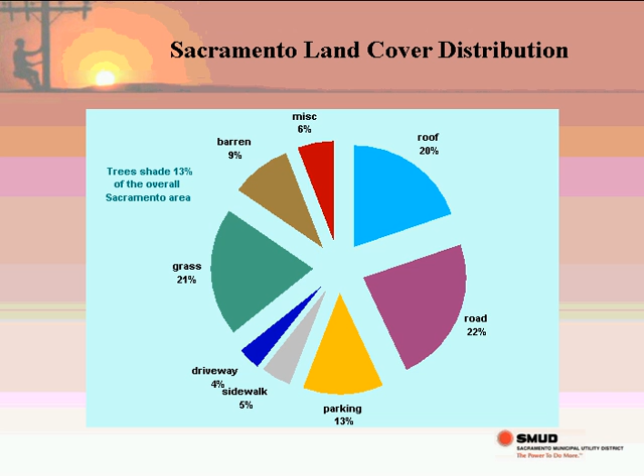So what we did early in the 1990s was an assessment: what is the land cover distribution? And we discovered that about 21% of our land cover is vegetation, grass or trees. In fact, about 13% trees. Then 20% are roof, 22% are roads, 13% parking, etc. So we developed a program to mitigate the urban heat island effect. One way to mitigate the urban heat island effect is to increase vegetation. So in 1990, we started the SMUD Shade Tree program.

Then in 2001, we started the cool roof program. The objective was to increase the roof albedo or reflectivity. And with both the shade tree program and cool roof program, SMUD was the first utility in the nation to set up a program to promote tree planting and cool roofs. We do not have anything for light color pavements, but the bottom line is we have at least two programs for two measures: increase vegetation and increase roof albedos.

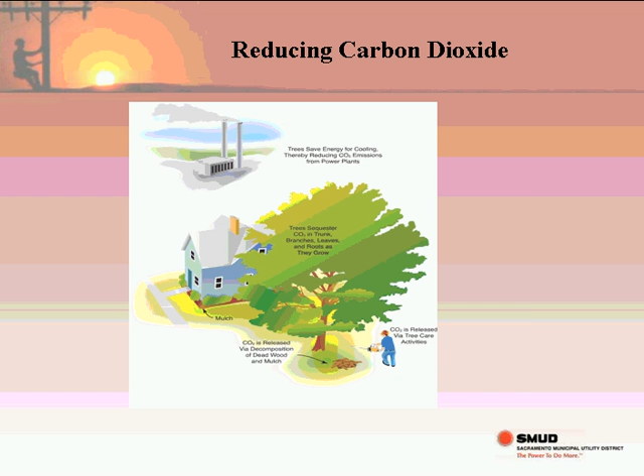Trees provide energy-saving benefits. They provide direct shading. They provide evapotranspiration effect. In the winter months, they provide a wind shield and therefore reduce the heating need. So they provide clearly energy-saving benefits. Trees also provide benefits in terms of carbon sequestration. They sequester carbon from carbon dioxide, and also they improve our air quality. They release oxygen back into the atmosphere.

So when we define the program objectives, our primary and short-term objective is clearly load reduction, reduced electric peak demand of air conditioning during the hot summer months. And we have very hot summer days, 5 to 10 times in a month. In the summer months, the temperature exceeds 100 degrees Fahrenheit.

Our secondary long-term objective is reducing the urban heat island effect, reducing the ambient temperature in the city 1 to 2 degrees Fahrenheit, and therefore indirectly reducing the air conditioning need. And the tertiary long-term objective is market transformation. We would like trees to be the standard practice when it comes to urban planning, urban growth.

And we recognize immediately up front that trees provide positive externalities like air quality improvements, carbon sequestration, enhancing aesthetics in the region, promoting the sense of community, but we do not necessarily quantify those benefits and try to incorporate them into cost-effectiveness analysis.

We started the program Sacramento Shade in 1990. The program was implemented in collaboration with the Sacramento Tree Foundation, which is a local nonprofit community-based organization. It's funded 100% by SMUD. We provide pretty much everything free: 5-gallon trees, stakes, ties, fertilizers, and expert advice coming from Sacramento Tree Foundation.

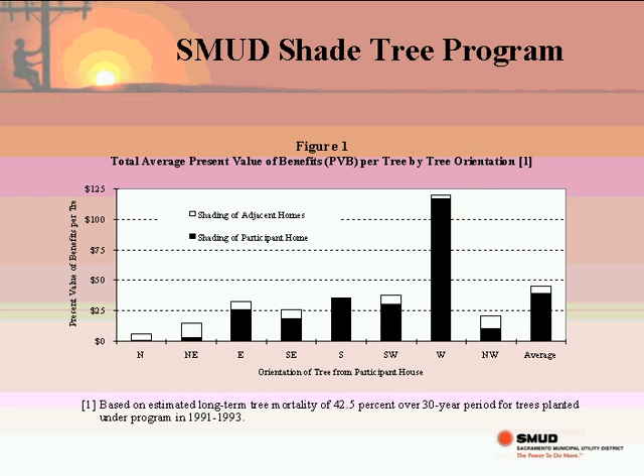When we convert those benefits in present value terms, we come up with a value of PVB. So here gives you the benefits of the trees in different cardinal orientations. As you can see, the west by far provides most benefits.

Then we take a look where the trees are planted. This was all done in 1996 when we did our impact evaluation study. We discovered between 1990 and 1996 the trees were planted everywhere, all over the map. What we wanted to do is design the program where we would end up promoting tree planting on the west side where the benefits are maximized.

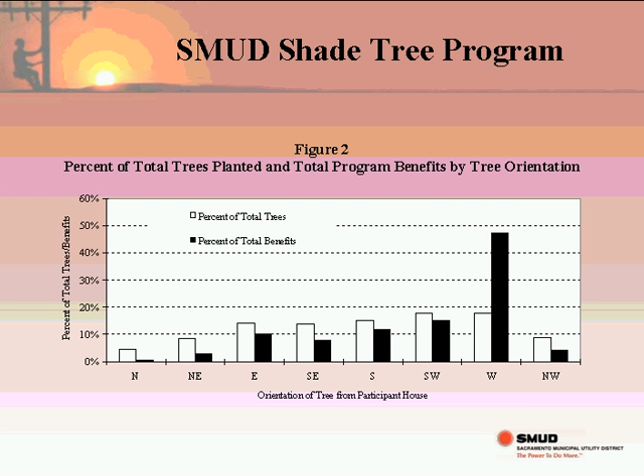So what we developed is tree siting guidelines for the program. This was implemented in 1997. We drew the line: only the trees where the PVB is greater than $20 per tree are allowed. So for example, if you have a small tree, you can plant a small tree near the building from 0 to 15 feet, adjacent to the building from 15 to 30 feet, and far from a building from 30 to 45 feet, or on east from 0 to 15 feet. Those are the only tree locations allowed for small trees.

If you want to plant on the south, it has to be a medium tree or a large tree. So you can see, for example, this gives incentive to Sacramento Tree Foundation to promote large trees planted rather than small trees, and promotes tree plantings on the west side rather than somewhere else.

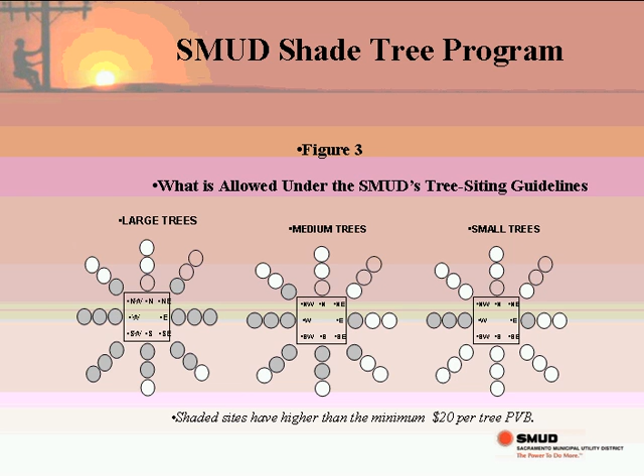In addition to Sacramento Shade, we have a community shade component. It was implemented in 1997. It was designed to plant trees for public places like schools, parks, streets. It's also implemented in collaboration with Sacramento Tree Foundation. It's 100% funded by SMUD.

This time we provide 15-gallon trees in addition to 5-gallon trees, free trees, stakes, ties, fertilizers, and expert advice from Sacramento Tree Foundation. We have about 20,000 trees planted since 1997. Our annual budget for the community shade program is $300,000, and since 1997 we have invested more than $2.5 million.

The average benefits of trees are 125 kWh per year per mature tree. This figure, 125, is the average tree. The value varies dramatically with orientation, tree size, tree distance, whether it's near, adjacent, or far. So this 125 represents the average value of kWh savings of all those 450,000 trees planted since 1990.

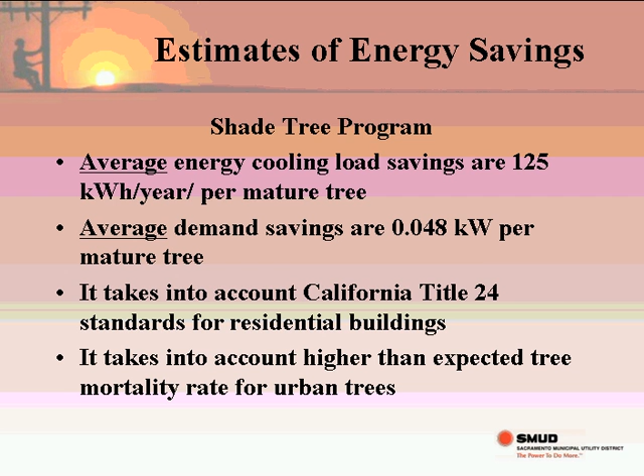The average demand savings is 0.048 kW per mature tree. This figure was revised recently to take into account the improvements in energy efficiency due to California Title 24 standards for residential buildings, and also we took into account the higher than expected tree mortality rate for urban trees that we experienced in the program.

In terms of the carbon benefits, we group the benefits for large-sized trees, medium-sized trees, and small-sized trees. And here it gives you the value of the total carbon sequestered and total CO2 sequestered for large, medium, and small-sized trees. This does not take into account environmental benefits of the avoided power generation. That is reported separately as part of our energy efficiency portfolio.

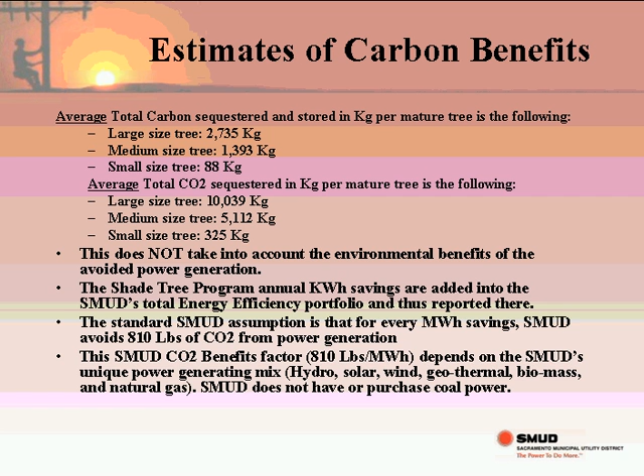And that benefit varies dramatically from utility to utility because each utility has a different energy mix. Our energy mix is very clean. We have a lot of hydro, solar, wind, geothermal, biomass, and natural gas. We do not have any coal power. So for SMUD, we assume for every megawatt hour of savings, we save 810 pounds of CO2. So that's our assumption specifically for SMUD. Different utilities might have a different benefit.

In addition to promoting the program, promoting the shade tree, we created something called Tree Benefit Estimator. It was posted on our website, www.smud.org. There you can input the data specific to your tree siting, tree planting, and it will give you the total kWh savings, kW savings, carbon and CO2 sequestration benefits. It takes into account different climate zones in the United States, and it's a relatively simple tool. You don't have to have a background in demand-side management or urban forestry.

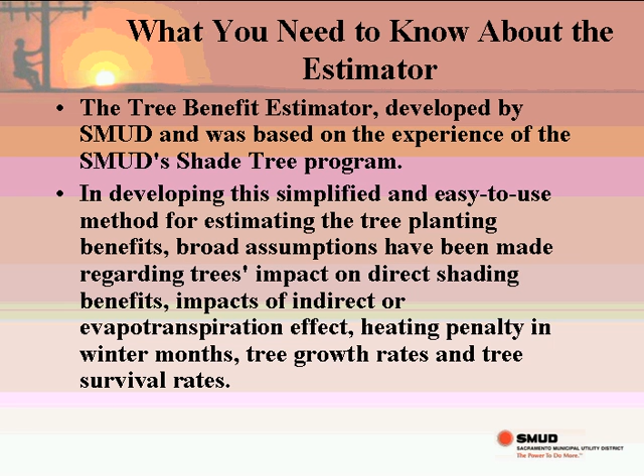The tool was developed by SMUD. It's based on our SMUD Shade Tree Program experience. It was developed to be an easy, free tool. It oversimplifies some of the aspects of urban forestry. It has certain assumptions which are rather broad, but nevertheless takes into account the impacts of direct shading, evapotranspiration, heating penalty, and takes into account the tree growth rates and tree survival rates.

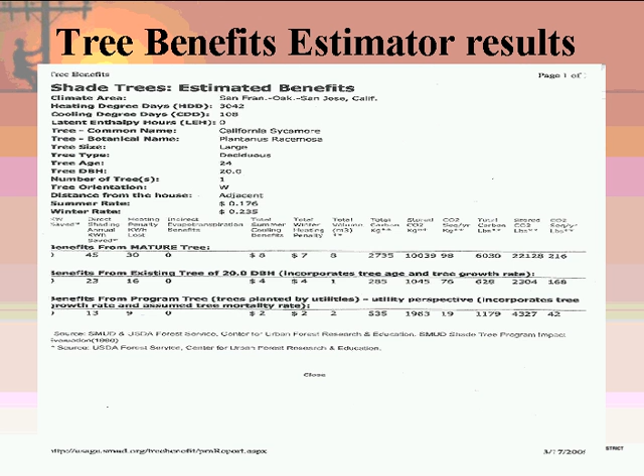And here I printed a printout for the San Francisco, Oakland, San Jose, California area as an example of what will be the benefits of a mature tree planted, let's say, 20 years ago, and program trees. Program trees take into account the mortality rate and a growth curve. And the same printout for Sacramento, California. So the same analysis can be done for any climate zone in the United States. And that's that for me.

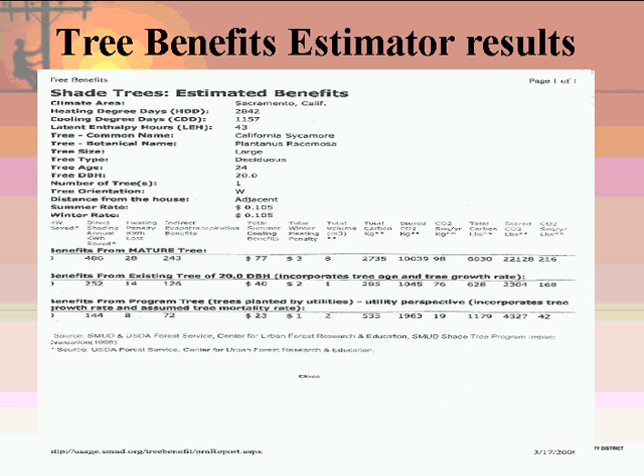So, all right, well, great. Well, thank you, Misha. We'll move on, and if there are further questions for Misha, we can get to those after everyone has presented. Our next presenter is Jeffrey Donovan.

He is a research forester for the USDA Forest Service's Pacific Northwest Research Station. His two main research areas are the economics of wildfire and the economics of urban forestry. And his urban forestry work includes studies quantifying the effect of trees on property value, energy use, crime, and health. Jeffrey has a bachelor's degree in biochemistry from Sheffield University and a doctorate in forest economics from Colorado State University. Jeffrey, the floor is yours. Thank you very much.

So a couple of years ago, I became interested in the effect of trees on energy use, and in particular summertime energy use, because there hadn't been any studies that had actually used utility billing data. Most of the studies take a modeling approach, or in one case an experimental approach. Trees were brought in containers, but nobody had actually analyzed the utility billing data.

And unfortunately, in Portland here, it's not really warm enough in the summer; most houses don't have air conditioning. So I was looking for an area that was warm in the summer I could use as a study area. And Greg McPherson, a colleague in Davis, suggested Sacramento, and he put me in touch with Misha and Jacob, both of whom were very interested and very helpful. And this study couldn't have happened without either of them.

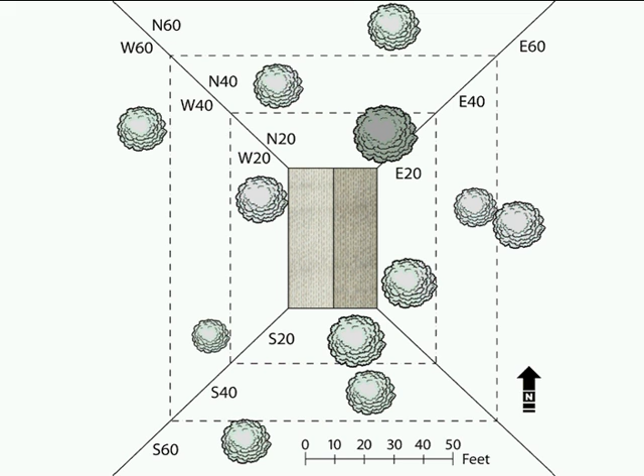So what we found was, roughly speaking, let's see our next slide. So trees within 60 feet of the west side of a house reduce summertime electricity use. Within 40 feet of the south side, and then this was an odd result, within 20 feet of the north side of the house actually increased summertime electricity use. And I'll return to that. So these results are consistent with what Misha was showing you. And I have a little diagram which I think will help explain those.

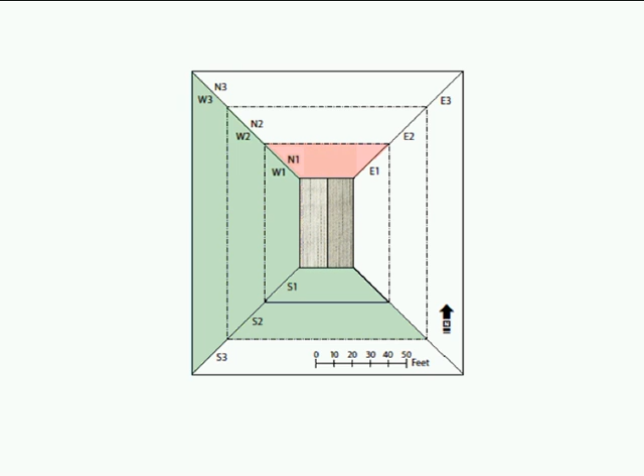And the best I can explain this is that trees close to the house, so within 20 feet, may act as a sort of heat blanket. That is, they slow radiant cooling at night. And this would be true of trees on any side of the house. But trees on the north don't have shade to offset that. So it clearly suggests that trees on the north side, not only do they not shade the house, it's possible that they may also increase summertime electricity use. So clearly you want to avoid them there.

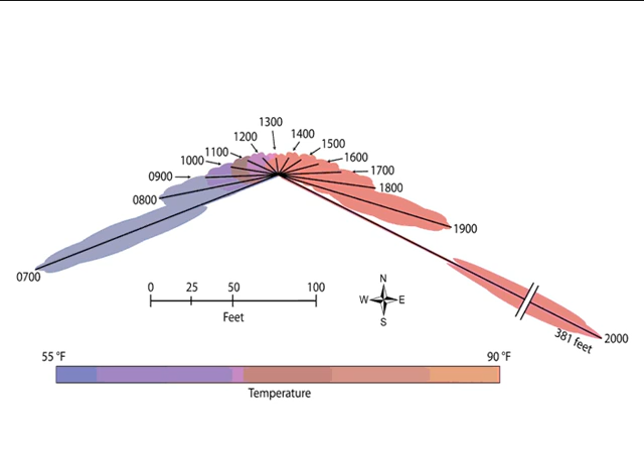So definitely trees to the west of the house are more important to the utility and will become more important to the consumers, because I know in Sacramento, and I assume in other parts of the country, utilities are starting to move towards time of day pricing. I believe, I don't know if it's all of California, there's a legislative mandate to do so. So then for residential customers, it will also be important, and trees to the west will become even more important.

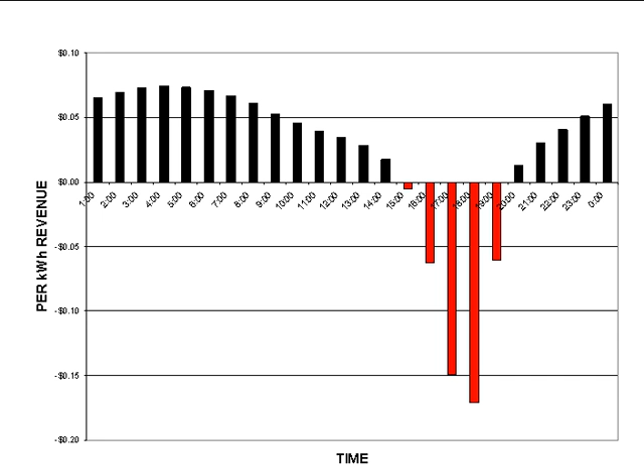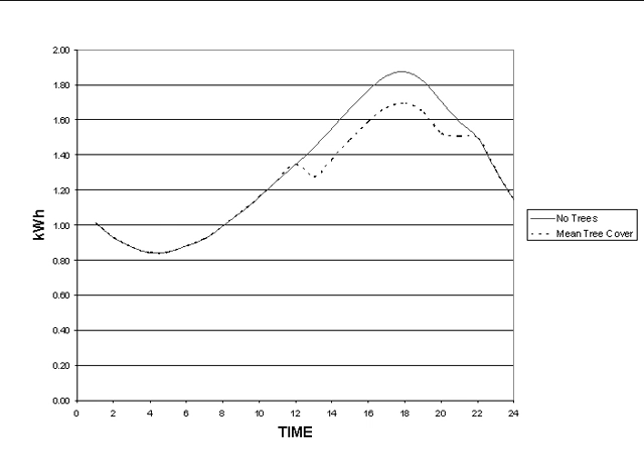Indeed, the analysis I did showed that SMUD is paying, I believe, about $85 per tree, and if that tree is planted on the west side of the house and it survived, they would recoup that investment in around 26 years. So it is a cost-effective way of them reducing peak demand.

And I don't want to use too much time, but I'll very briefly mention, although I go over it more in my paper, carbon benefits. And as Misha said, there are two types of carbon sequestration benefits a tree can do. It can directly sequester into the tree itself, or it can reduce emissions from electricity generation.

And this next slide shows there's two lines. What it essentially says is that these two types of benefits were roughly equal in Sacramento. So about half the benefits were from direct sequestration, and the other half were from avoided emissions from energy generation. So that's all I have.

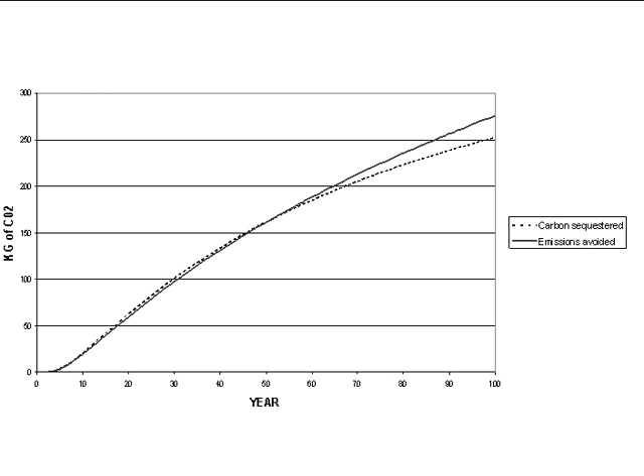It just depends on the size of the tree and its location. Clearly, a relatively small tree quite close to the house can still have some modest effect. But if that small tree is a long way from the house, then it's going to have little effect. So it's all proportional to the size of the tree.

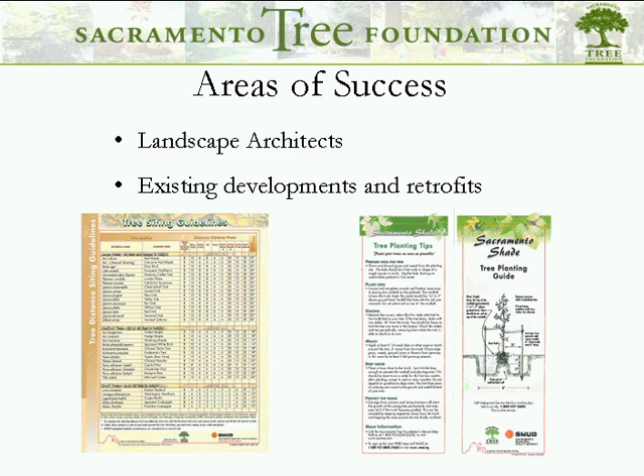So I want to transition now to homeowners, because homeowners remain the large bulk of consumers for free energy-saving trees. Probably 90 to 95% of the trees we distribute are to homeowners. On average, we provide about two to three trees per home. And the question really is why, or what is motivating homeowners to partake in the program?

And we have a number of sources for informing us of why homeowners do participate. There's, of course, anecdotal evidence. Every year, SMUD does a survey of its customers, and we get some limited response there. We've been very successful, actually, working with a UC Berkeley graduate student named Lara Roman, who's been implementing a mortality rate study effectively for the shade tree program to see what our true mortality rate is. And it's a 5-year longitudinal study.

But as a result of that study, we're also able to capture information from homeowners about why they participated and have some more information from that study as well. We also had a very insightful homeowner focus group that brought together homeowners and volunteers at the Sacramento Tree Foundation, contracted with a company called GroupWorks to implement this focus group to see how it could impact urban forest. And part of that was about why people like planting trees. So let me start there, and I'll move forward to some of the other areas as well.

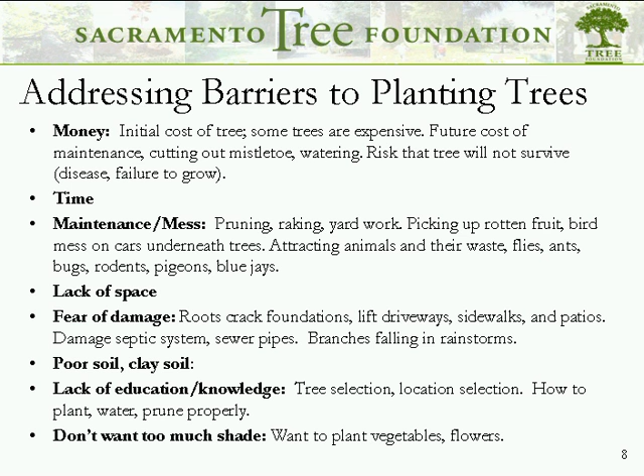This next list is just a list of barriers to planting trees, and I'm going to skip through here because it's fairly self-explanatory and in the interest of saving time. If anybody has any questions about these, you can follow up with me later.

And then finally, our survival study about why people participate in the shade tree program. And it is primarily because of energy, again the same as the results of the focus group: energy reduction from shade and landscape beauty, and of course the fact that the trees are free doesn't hurt at all either.

So let me just finish with a little bit of commentary about whether or not a tree planting subsidy is warranted or effective. And from Nisha and Jeffrey's slide, you can really get the idea that of course trees make a big impact on energy savings, and there's a real positive dollar return from that energy saving impact. The degree of subsidy really depends on the degree of energy savings. It's different for every region.

One thing I did want to mention, we don't actually plant the tree for homeowners, and there's a reason for that: we really want the homeowner to feel invested in the tree. They get this phenomenal free site visit. The forester goes out there and selects the right tree for them. We provide them with the stakes and ties. The homeowner's investment is to actually go out and physically plant the tree. And the theory there is that the homeowner will be more invested in the tree and water it, make sure that it survives for the long run.